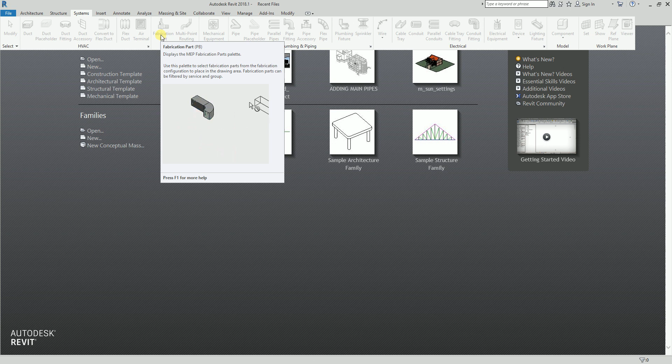So the feature that we're going to talk about in this short video is the multi-point routing. This is actually a new feature in 2018. Before, for fabrication, you only had fabrication parts wherein you can only place your duct one by one, part by part, just like what you are seeing right now in this video. You see that small animation. So before, you could only place the fabrication just like that. You needed to place it one by one.

Now with Revit 2018, you have this new tool, multi-point routing. It automatically builds a run of connected MEP fabrication parts by clicking points in the model. So it's just like you're using your normal duct or pipe tool.

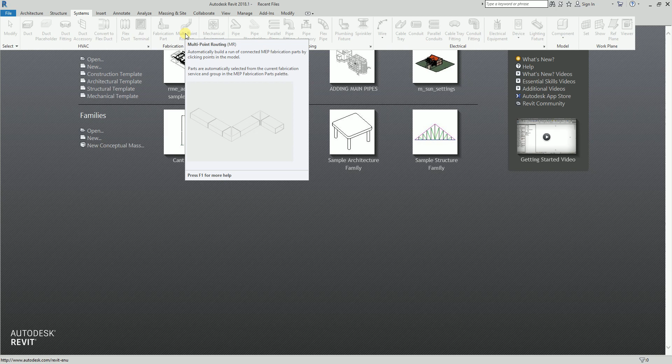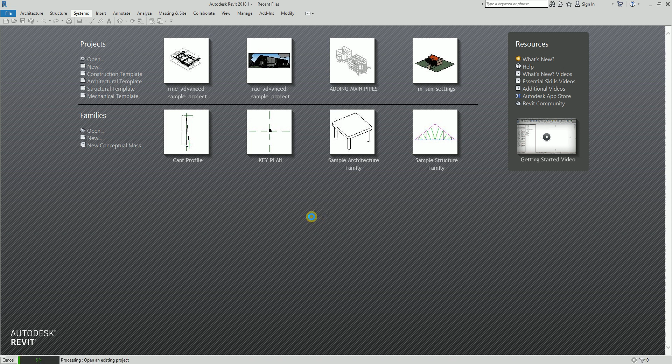So let's go ahead and start by opening a sample Revit project. For those of you who don't have the Revit project, you can always click this, then go to sample files, and look for MEP. Let's say I just use the advanced one, and then open, just to show you how the multi-point routing for fabrication elements works. Right. So let me just open the floor plan here. Let me open the level 1 HVAC plan.

So as you can see, my MEP fabrication parts is already open. To open the MEP fabrication parts, you just need to go to Systems, and then click this one. The only issue right now is there is no service and group yet loaded in my MEP fabrication parts. So to do that, there is an instruction here. It says click settings to select a fabrication configuration and load the fabrication service into the model.

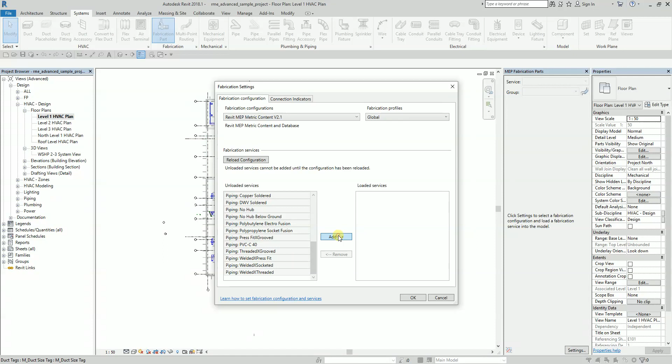All right, so I'm gonna go ahead and select settings. Actually, you can also select this arrow here. It's the same. It will open the fabrication settings. You click the drop down arrow here, and since I'm using metric, I use the metric here. And then all you have to do is select the services that you want to load to your project. You select all of this. You click one, move the slider down, hold the shift, click the last one, and then you select add. And after that, you just need to select OK.

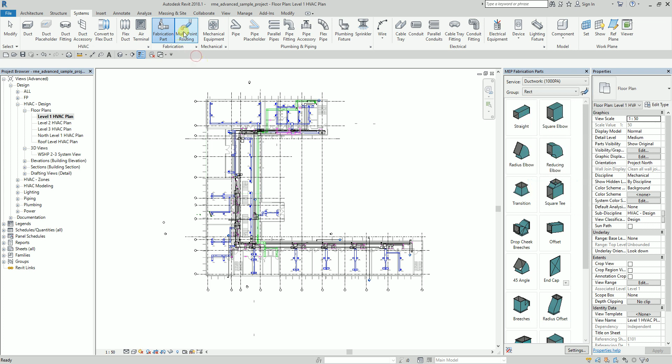So here in MEP fabrication parts, you can change the shape, the size, elevation, and the type of fittings, for example, from mitered elbow to radius elbow as you route the elements. So now it's loaded. Let me go ahead now and select the multi-point routing. I just use the service ductwork 1000 PA. So I select multi-point routing, you click that, and let me just go ahead and create here. So I'm gonna go ahead and pick.

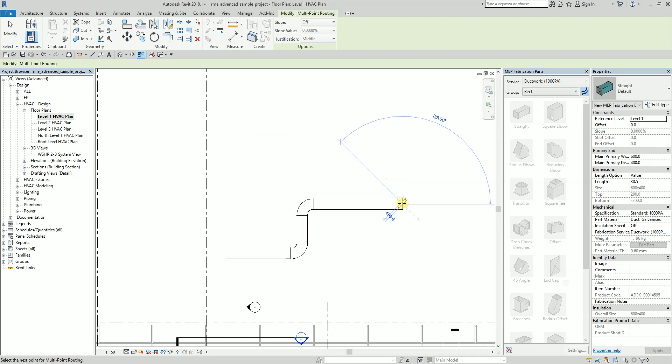So using this tool, Revit automatically builds a run of connected MEP fabrication parts by clicking points in the model, right? Okay, so parts are automatically selected from the current service and group in the MEP fabrication parts palette. Okay, right.

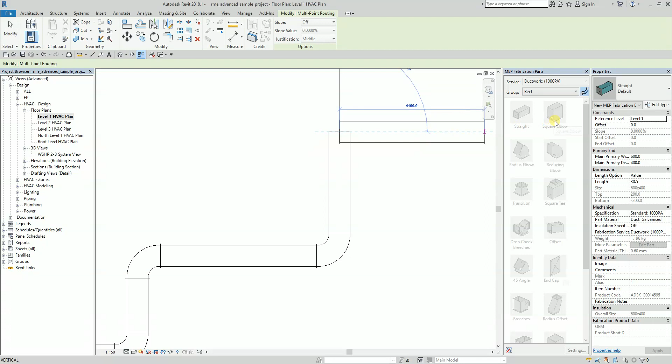So if you want to, let's say for example, instead of the elbow, use the mitered elbow or squared elbow, there's an option here. You can click to enter the autofill tool exclusion mode. So let's say I only want the fabrication setting to use the square elbow. I do not want to use this type of elbows here. So what you can do is you can click this.

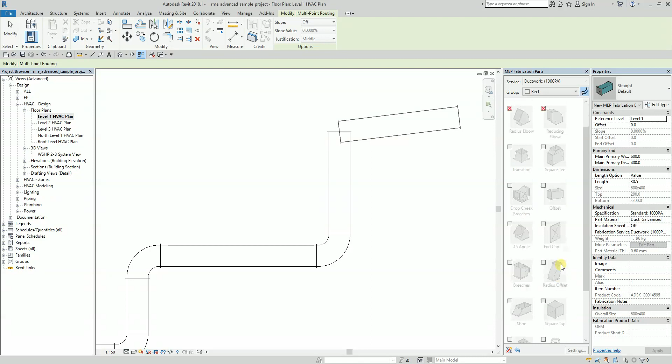There you go. And then you can now exclude the fittings that you do not want to be included. So I'm going to exclude the radius elbow, reducing elbow, and the 45 angle. Okay, so basically I only have the mitered elbow. So as you can see, if I pick here, there you go. It will now create the mitered elbow.

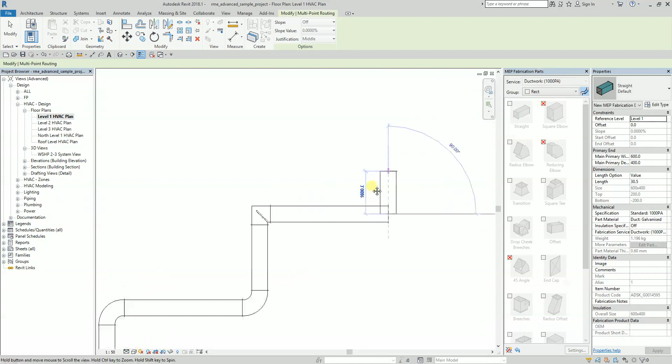So let's say I only want to have the radius elbow. So I'm going to go ahead and deselect, and then I select this to be excluded. Now, if I create again, it will now create the radius elbow. So basically, that's how it works.

So once you have laid it out, you can still modify your fabrication from the properties here. Okay. So I'm going to select modify here and then select again modify. So if you click this one, you can still modify from here, right?

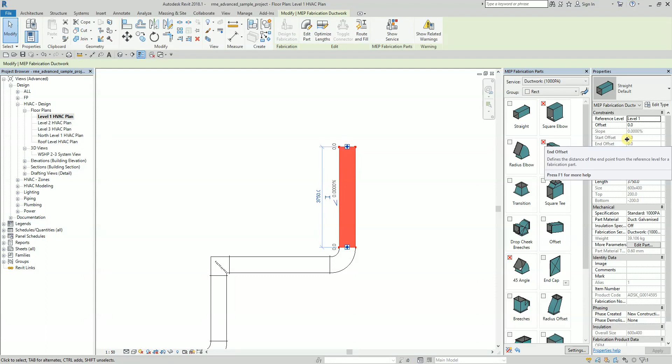Okay. And one good thing about the multi-point routing tool is it will take into consideration the fitting and group priority settings, conditions, connectivity rules, and other functionality that is specific to the fabrication. Okay, you can also tap in or tee off of the different elements.

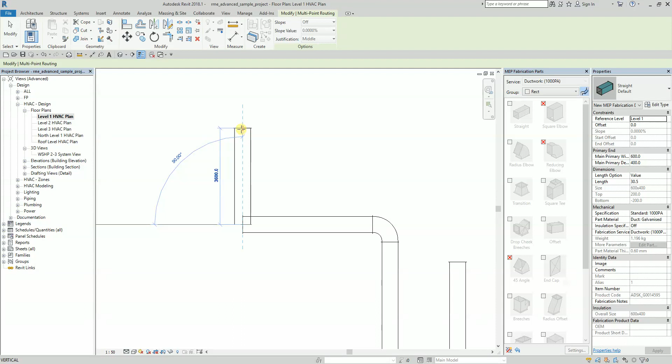Like for example, multi-point routing. Let's say I pick here. I pick. All right, you see, you can tap in just like that, and then you are now able to go again and do your fabrication ducting. Okay, and then I can select modify. Right. Okay, so using this tool here.

You can actually undo that, to go back to the normal state of the fabrication settings here. Okay, so that's it for this one.

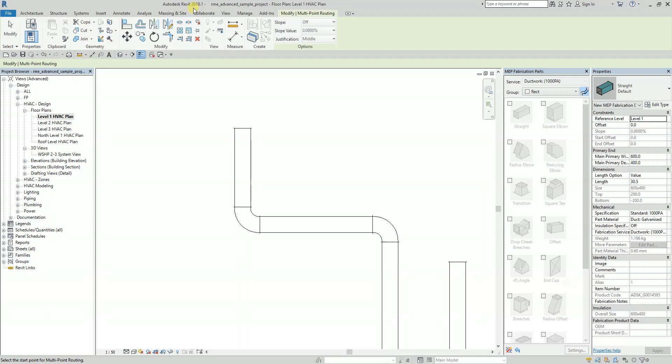And if you are going to update your Revit to 2018.1, you will be able to slope your duct, or I mean, let's say you are working on pipe, you'll be able to create your multi-point routing for pipe with slope. Okay, you can add a slope. So let me just show you this quickly.

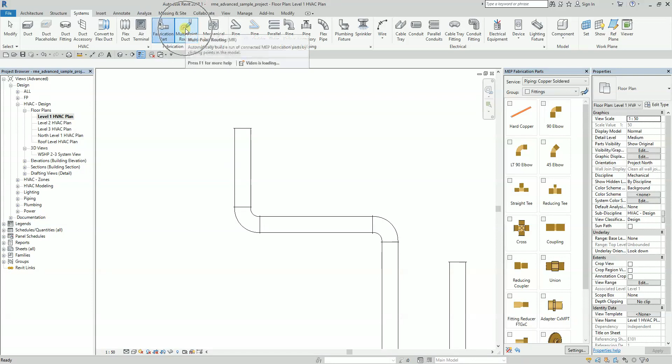Before I select the multi-point routing, I click the drop down and then look for a pipe setting here. So probably I use this one. It's just an example. I select this. I select multi-point routing. The size. What's the default size? Okay, the 6 one.

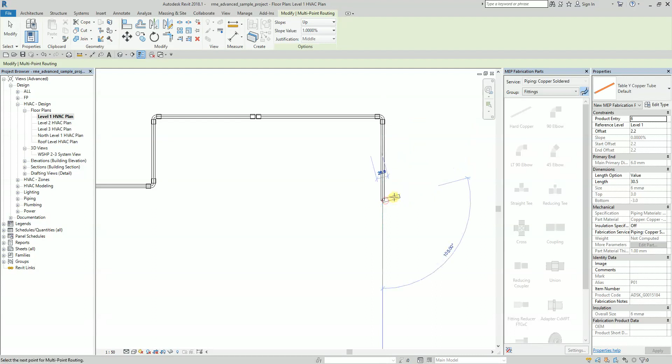Okay, so I pick here, and then I can specify here the slope. So let's say going up 1%. So I pick again. As you can see, in 2018.1 in multi-point routing, you have this option wherein you can specify the slope. Okay, so there you go for this new feature in Revit 2018 and Revit 2018.1.